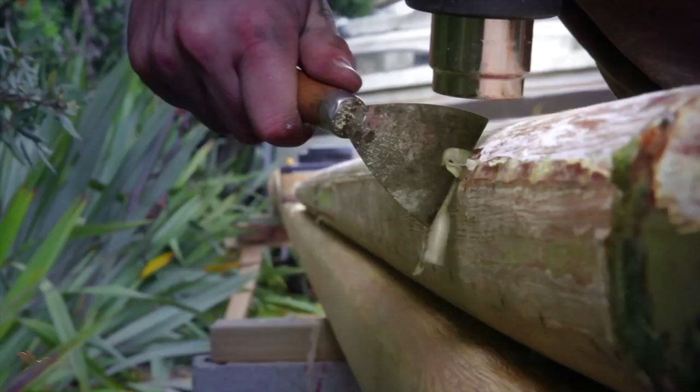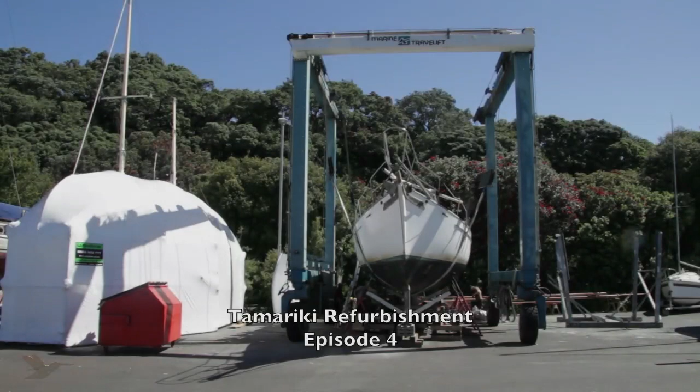So there's the new keel outline, and there's the old one down there. I'll double it, along there and up there. There's the new one, this darker outline. So I've made all that deadwood there, and the keel lead is going to be cast probably next week.

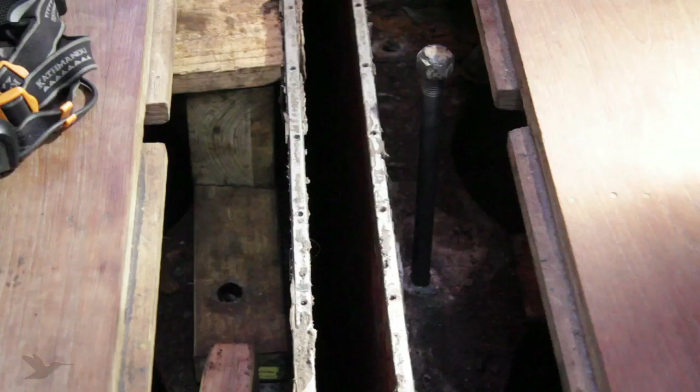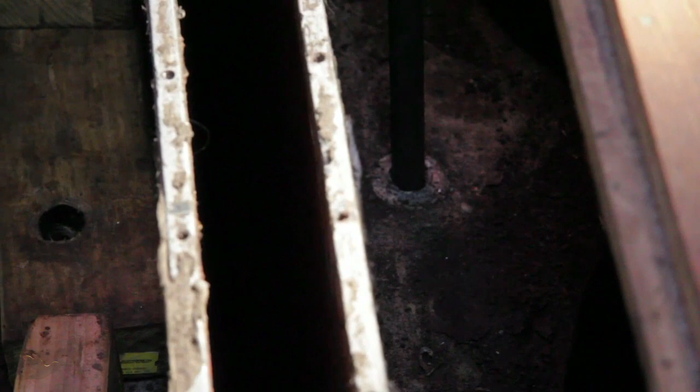The old keel and centre case is made up of a steel box section bolted to the hull, with an internal steel section. The lower part is fastened with 15 galvanised steel bolts. After 30 years he put in never-seize and it never seized, so all 15 bolts actually undid, and that's galvanised steel after 30 years.

Once the bolts are removed, the lower section should come away from the hull.

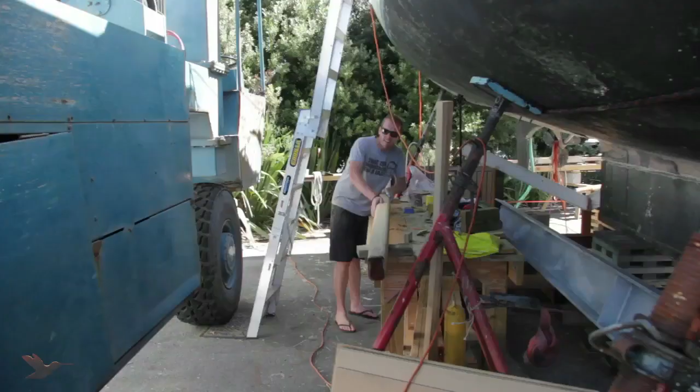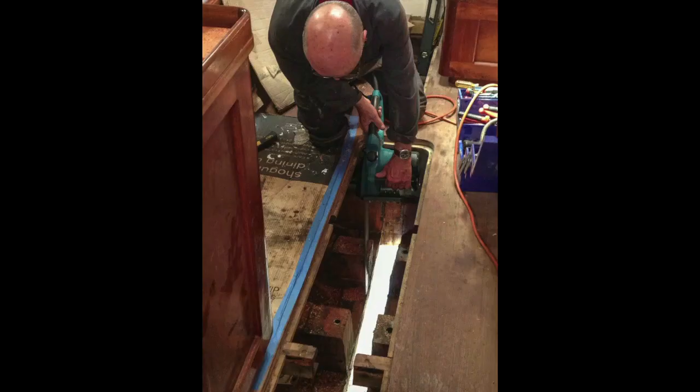Once the keel bolts had been removed, the old steel keel could be removed from the hull, towed out by the yard tractor and picked up for scrap. The new lead keel was cast in a local foundry and delivered to the site. Now the resurrection could commence, starting with the trimming of the timber bearers ready to fill the slot with new timber. But first there was a lot of old bilge gunge to clean, and guess who got the job.

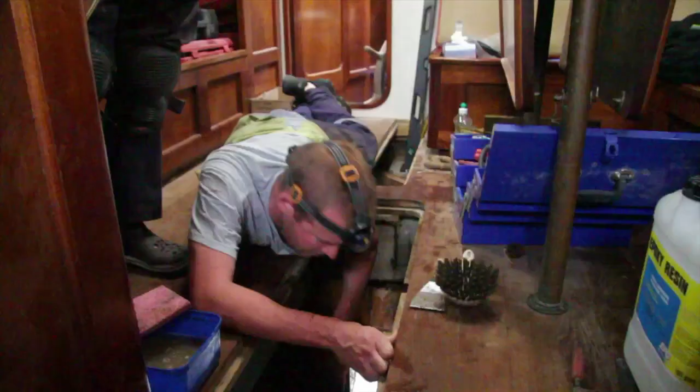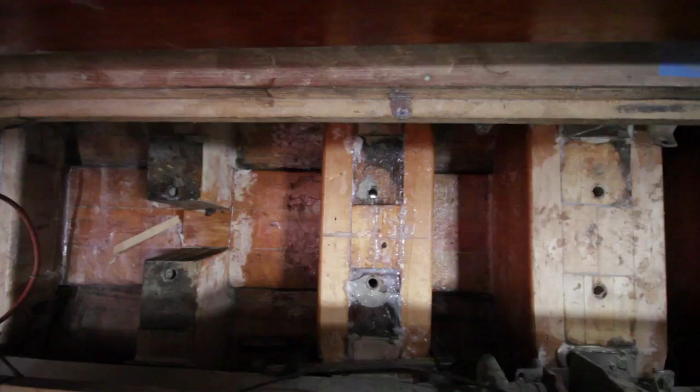The new timber was glued in to fill the slot, then doublers glued in each side of the old bearers to make them continuous. It's very sturdy looking, and the last doubler is to be glued in today, then the outside deadwood base glued to the hull. Great progress.

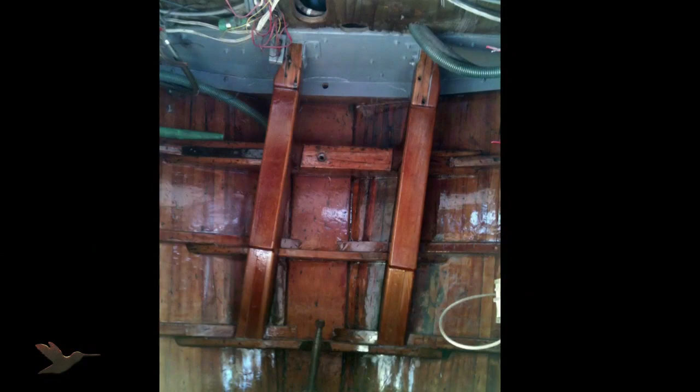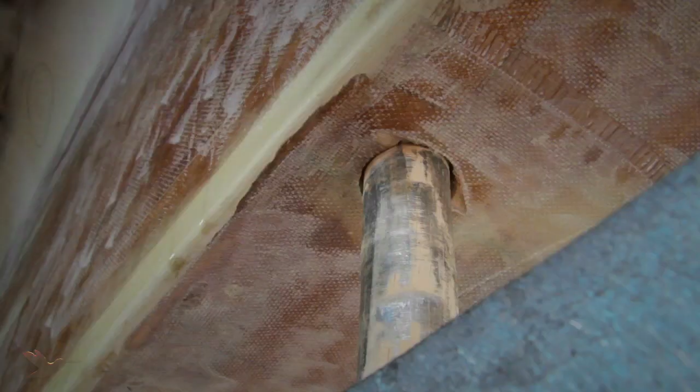Here's the team ready for the glue, about to start. Can you explain what you're going to do? We're going to use the cold resin, mixing it as quickly as we can.

James is keen to go. Glue and some sawdust are going in it as well. Oh geez, it's certainly bloody thick - we didn't think the glue would get so thick with it getting cold.

Are you putting powder in it as well? That creates heat. And what's your task, Colin? The mixer - I'm a stirrer. Good mixing, it's like making ice cream, icing isn't it.

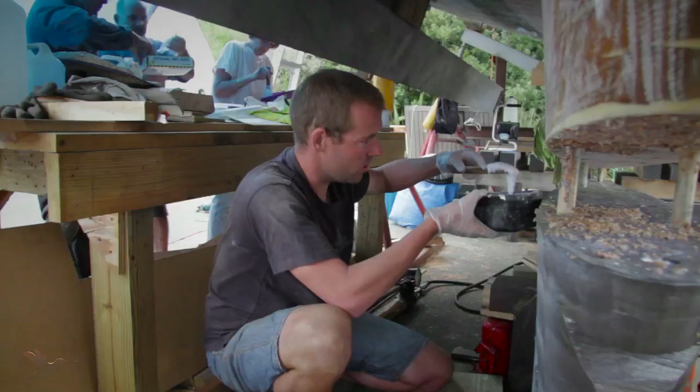The first dollop of goop to go in. There you go, there must be two.

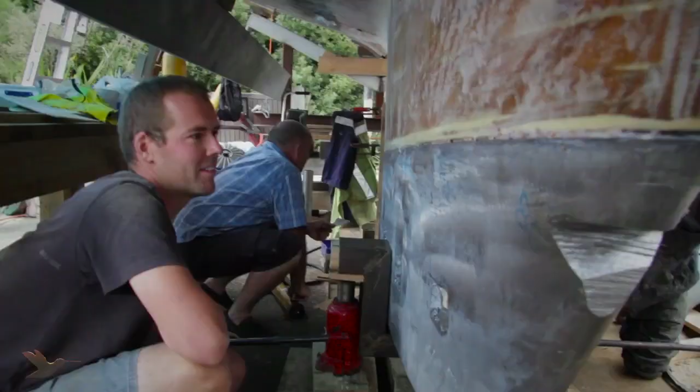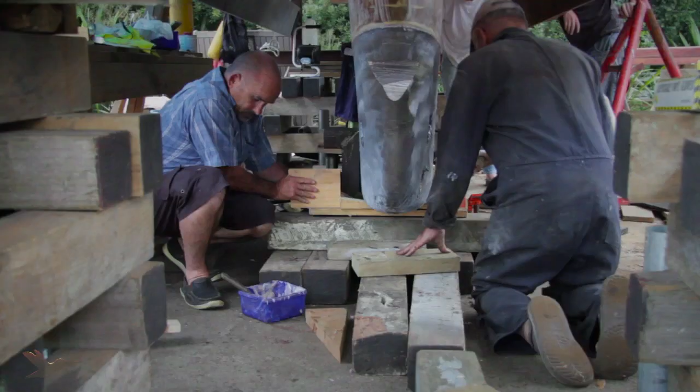How's this for multitasking, Roger? Two pumps. Oh, I think we just lifted the whole boat. Want to go up the front a bit? Yes, we've got ooze. Don't drop it.

The rudder has been lengthened now that the keel is deeper, to help control the boat.

James will be able to hold the kite up now in 25 knots. The starboard...

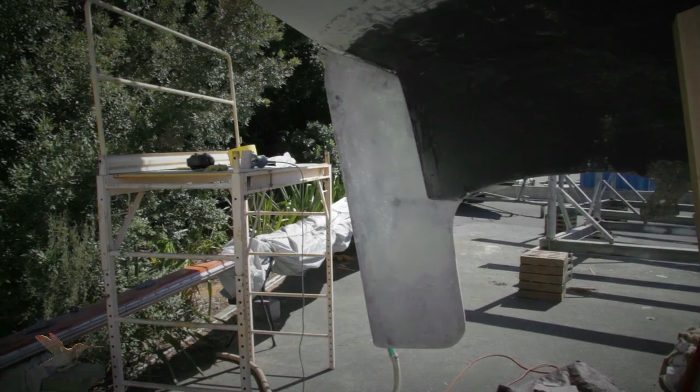Onward - the glass unit looks good, with a hole for our rope, should the quadrant ever give way. The hull is now being sanded to prepare for new paint to be applied by roller.

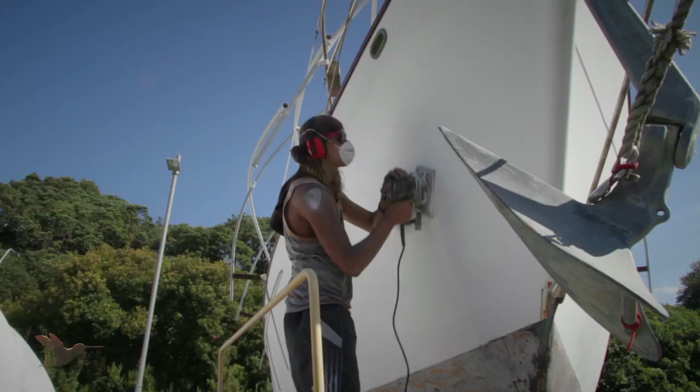So where's the colour come from on your shoulders? Bit of sanding dust. Yeah, but now we're going to do some sanding. Yeah, good.

When there's no one by your side.

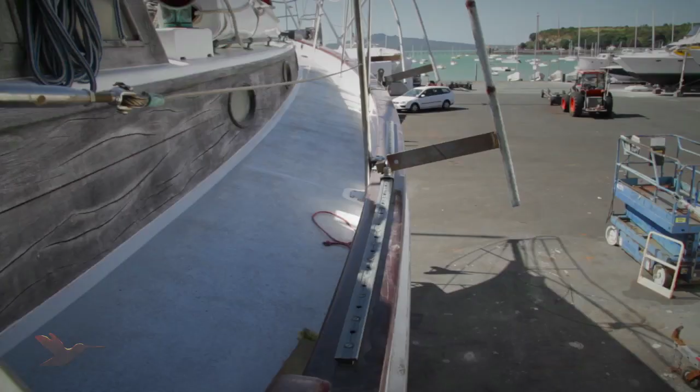The toe rail and bowsprit have all been revarnished and sparkle in this never-ending summer sun.

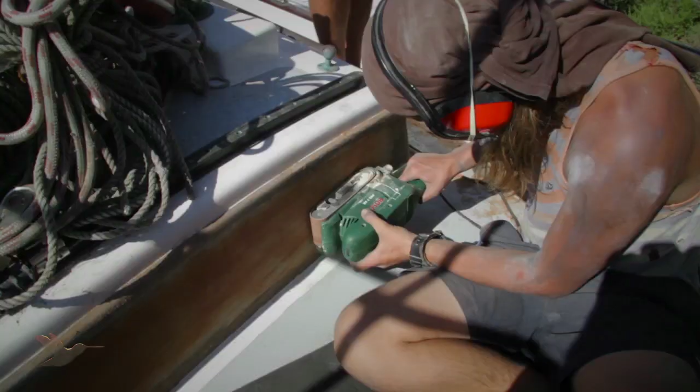Work has also just started on sanding the cabin sides, ready for a revarnish.

Cradled rocking to the waves, but still I'm lonely.

Salted lips and blistered - Pete has been busy in the engine room, putting in insulation, a new battery box and new wiring. It's ready now for the new fuel tanks and engine.

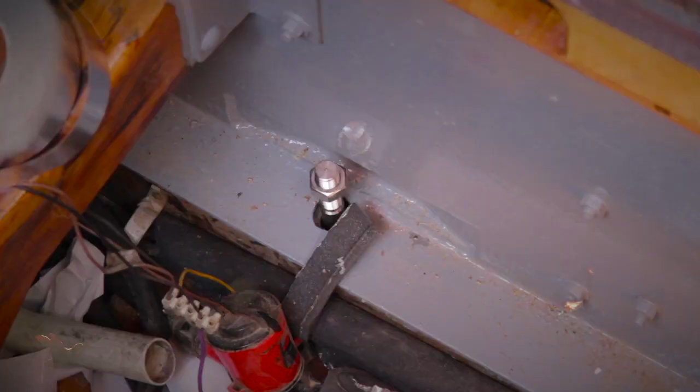The keel bolts have all arrived and are now ready for installing. They're all made of 2205 stainless.

A boat is on fire at a marina in Okahu Bay, Auckland. Shift Commander Megan Rudder says the boat is well ablaze. She says three fire crews are battling the blaze.

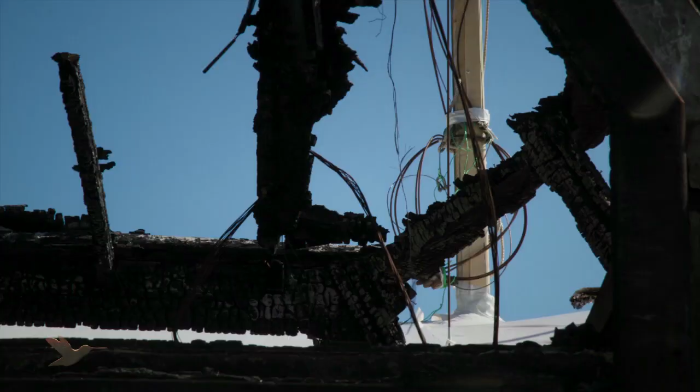In the time it took the fire service to arrive, the boat was ablaze. Tamaki Drive was closed and we were all kept well back in case the propane gas cylinders aboard the boat exploded. We all breathed a sigh of relief when the fire was out and Tamariki was safe.

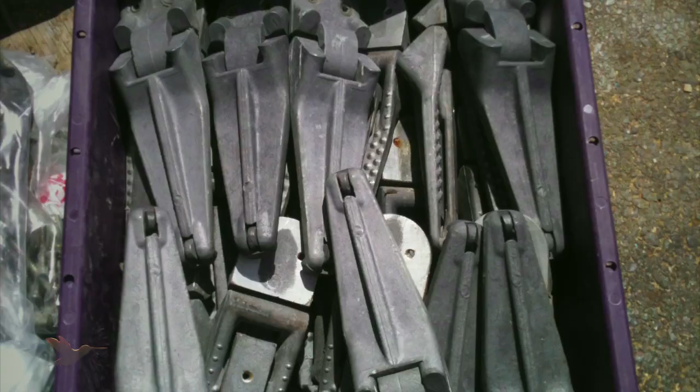With the last of the summer weather holding on into April, good progress was being made. The mast fittings were reattached, and Murray brought back the refurbished spreaders he had been working on, along with Lynn providing some welcome baking.

The sanding of the cabin sides progressed well, although James says he now has his PhD in sanding and there is no more to learn. The shakes in the cabin sides were filled with glue and sanding dust and given a coat of resin. The colour they came out looks fabulous.

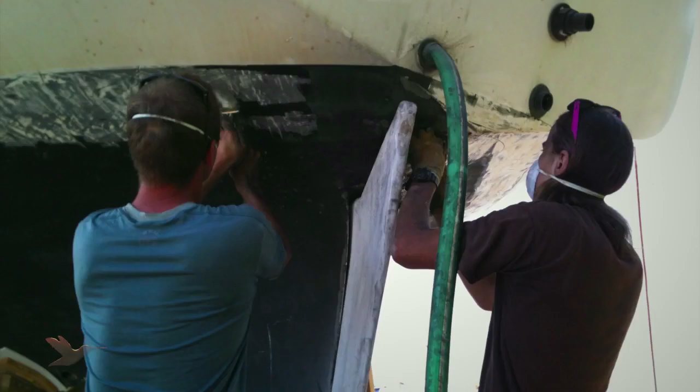In between times, there have been plenty of friends volunteering to help with some of the dirty work.

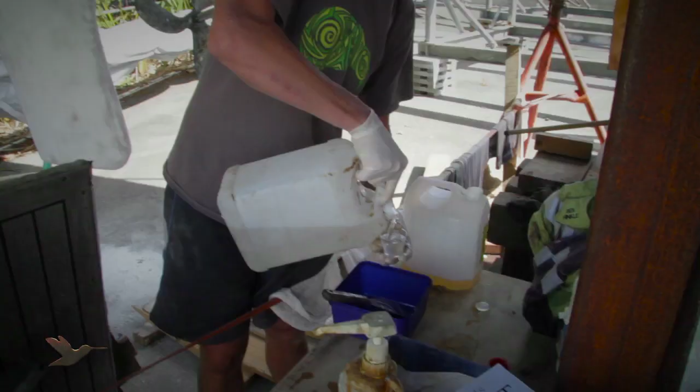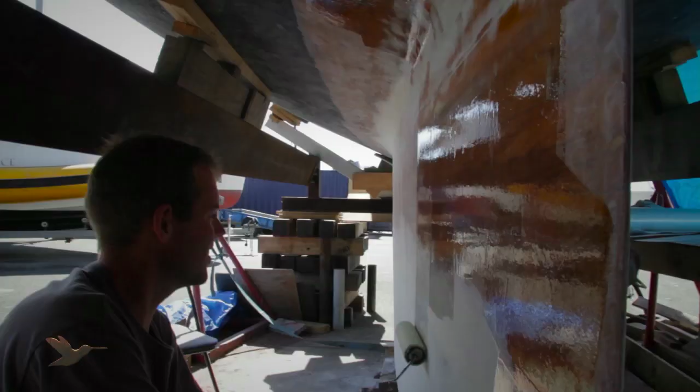The next job on the task list was to fiberglass the keel. Pete and James showed some good teamwork on what can be a very messy task. Oh, I don't mind. Bloody resin's going off, we can't wait.

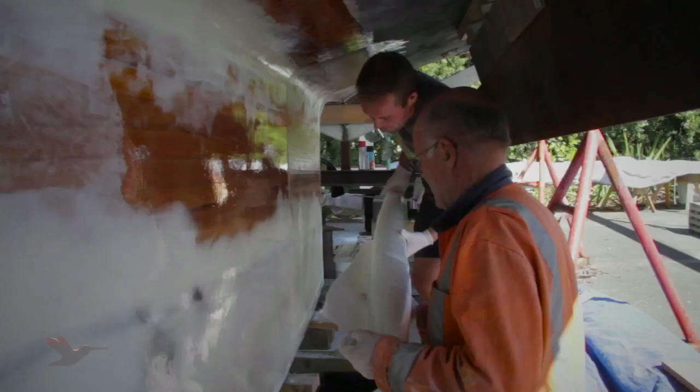The finished job looks great.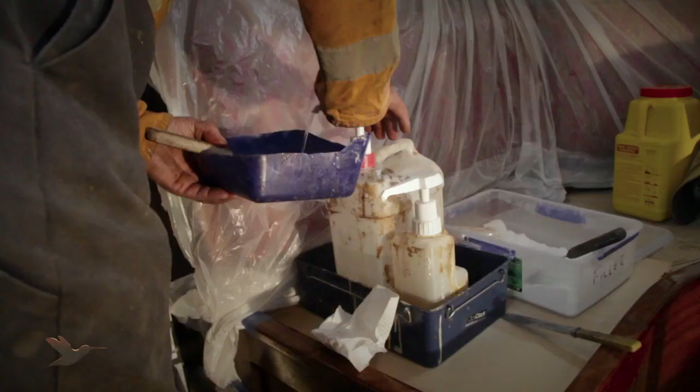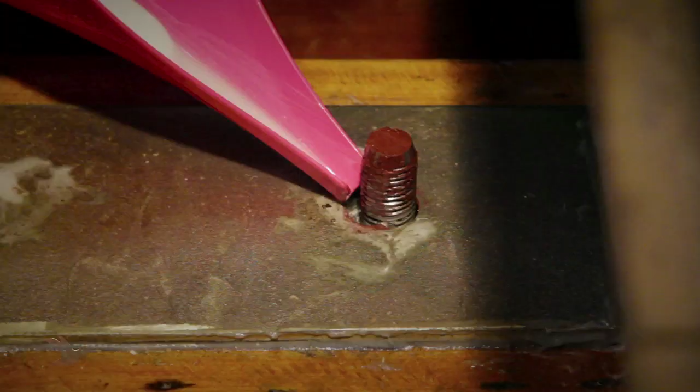Inevitably, the endless summer sun disappeared. The grey skies and wind returned. Time for an inside job, and with the fiberglassing finished, it was time to get the keel bolts fastened. This involved pouring resin down the oversized holes with a special purpose pourer. Nice colour. I don't know if I've got my qualification.

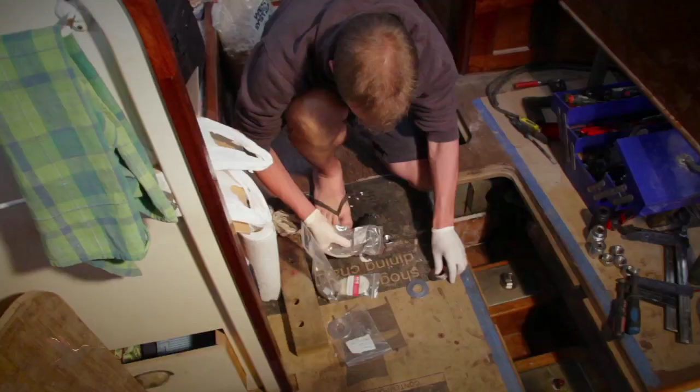Then it was a plastic washer to separate the stainless washers from the bronze spreading plates. The nuts were put on and tightened up, and maximum force was applied.

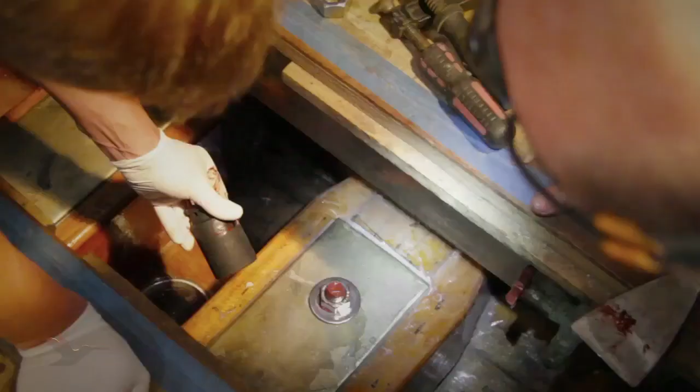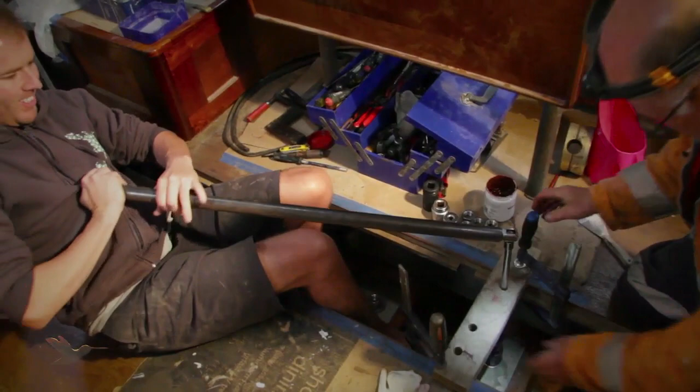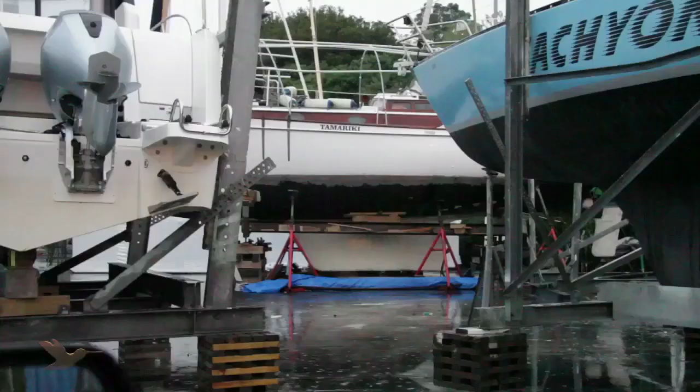The autumn thunderstorms arrived, giving Auckland much needed rain. While outside work was temporarily halted, Pete had plenty of work helping Devon make new aluminium fuel tanks.

Give us a grin, Dev, and tell us how happy you are to get rid of me.

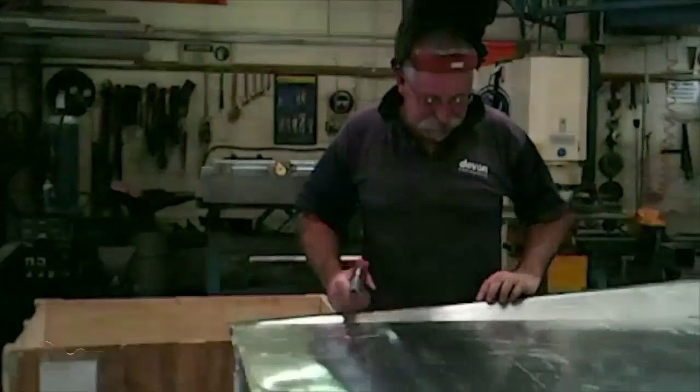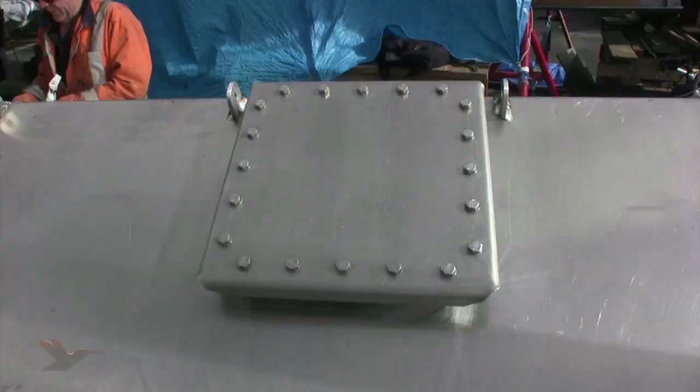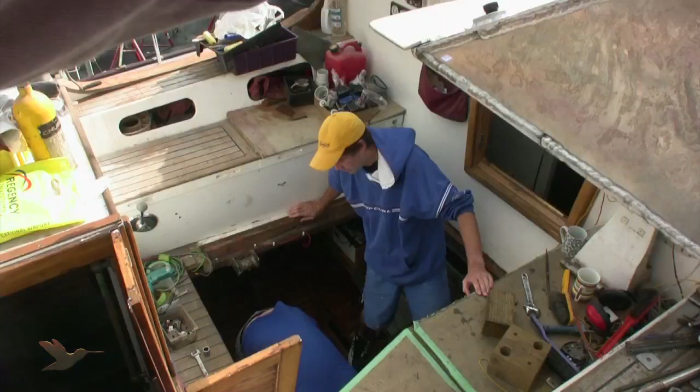The sun reappeared and the tanks were delivered. We had a few extra hands to help manoeuvre them into the engine room.

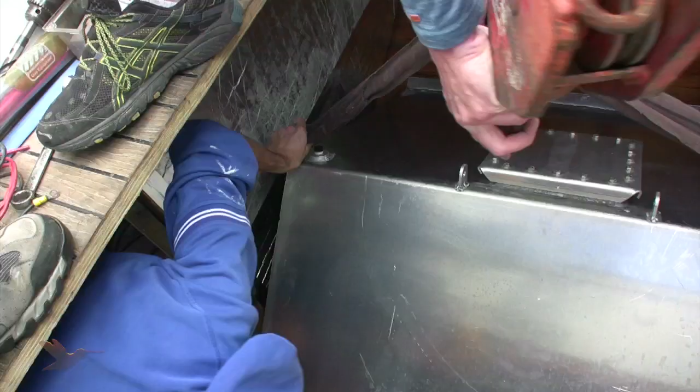Right. It's only done up by hand. Oh, you got business. You don't want to be rung. Not at the moment. Oh, I know. Oh, thank God, I was going to say, because we have to pull that out, otherwise it's going to...

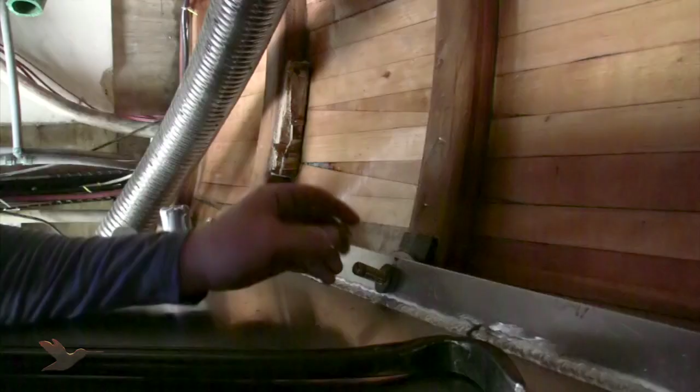With a bit of leverage and cajoling, Jane was able to get the nuts on the top fixing bolts and they were in.

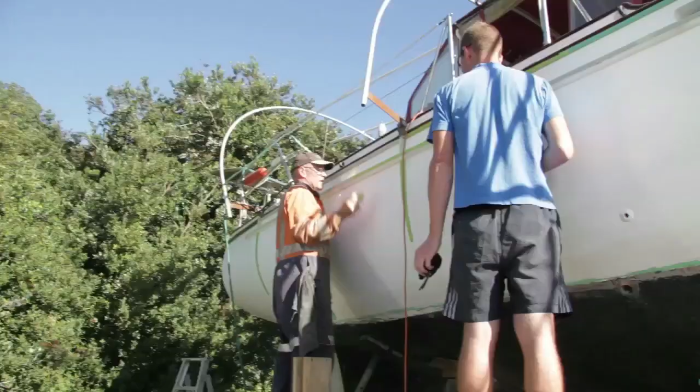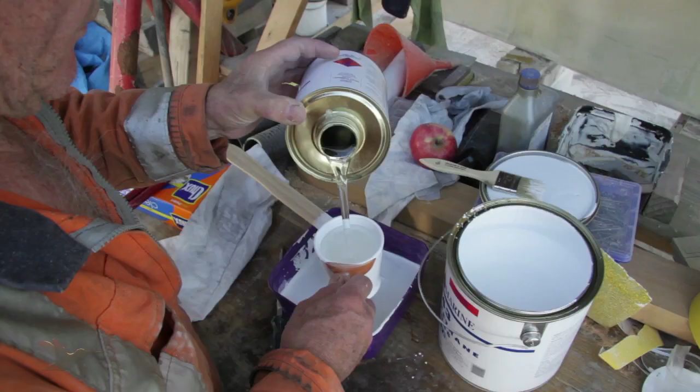With winter not far away, attention moved to painting the hull. A 3-day weather window opened up, so with perfectly still conditions, the slightly extended crew took action. Protective Paint's Transmarine 343, a 2-pack polyurethane material to give excellent durability, colour and gloss retention, was used to paint the hull.

Brushing thinners were used to help the application of the paint with the roller and the brush. Three coats were applied, one a day. Fortunately, temperatures were still high enough to get a good set before the evening moisture settled on the hull. The finished result made the owners very happy.

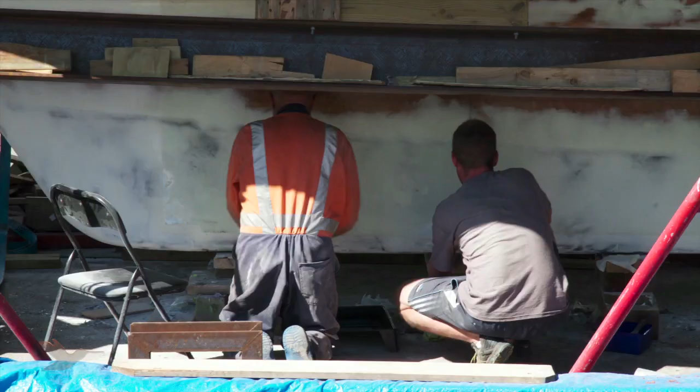A new furler has arrived from Brazil and the rigger is underway on replacing the standing rigging. The next jobs waiting are to finish some glassing on the keel where the support blocks are, and of course the new engine.